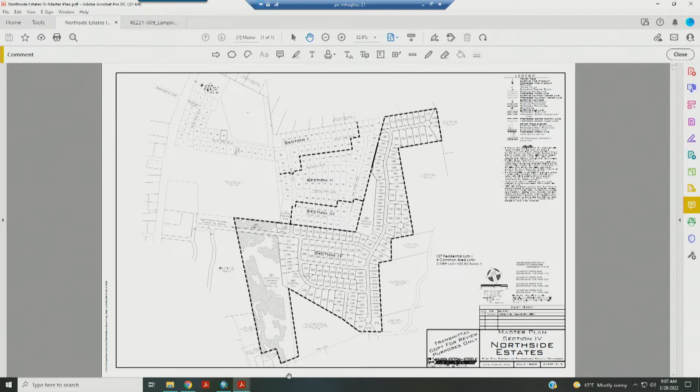There is Pitts Lane down here, and we're still looking at that. If any of y'all know Pitts Lane, it's no more than a nice wide driveway, so there might need to be some work done on it. But as far as drainage, going back to that, we're feeling pretty good about what they're proposing.

They've got a huge volume stormwater management area here that will hold back. We've asked them to evaluate pre and post volumes, so they're not sending more volume of water. They're holding back the increased volume on their side and not sending any more volume of water to the adjacent development. So we're feeling pretty good about that.

The only other thing that we need to work on, just a little fine tuning, is the kiosk. When it comes in with a preliminary, it's essentially a completed site plan. I'll try to zoom down to it. So there's a little fine tuning. We'll need some more spot shots, some grades, the handicap ramps. They've added truncated domes, but they actually need to have handicap ramps on either side of the driveway of this. So just some minor fine tuning, nothing we don't think is an issue.

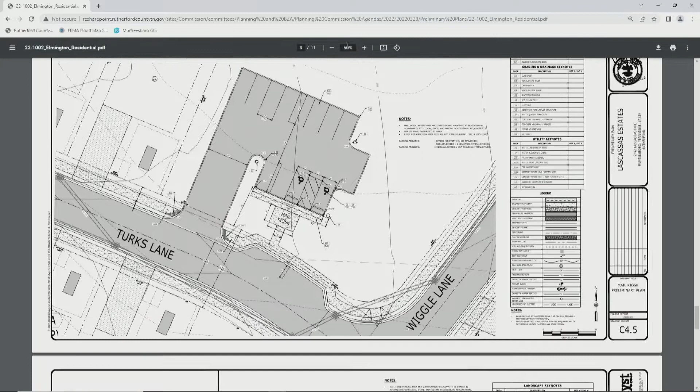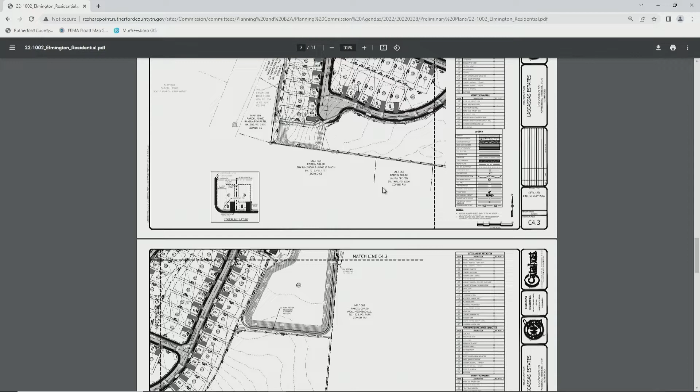Like I said, the real evaluation will come with the construction plans. So it hasn't been submitted yet, but we'll keep a close eye on the drainage, traffic, and everything else. This development will be adding turn lanes on Lascassas Pike, right turn decels and left turn, if you're coming south, you can turn left into the development. So there's a lot of work that's going to be done on Lascassas Pike, and since that's a state road, all that is coordinated with TDOT, and you can see all the turn lanes that they'll be adding with this development.

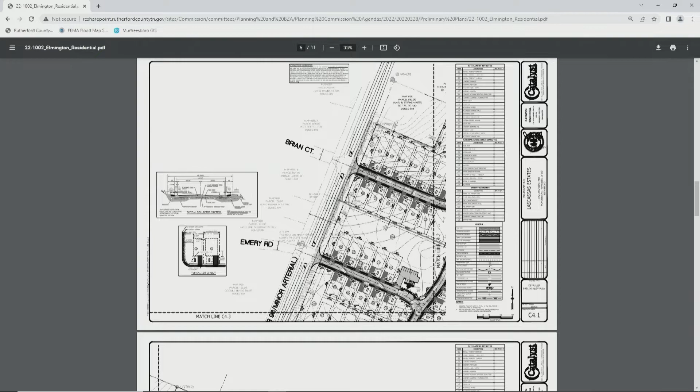So we believe they've addressed all of their comments except for a few minor ones, and what we said, working out with CUD with the landscaping, make sure they're not planting trees on top of the existing 20-inch water line. But other than that, we're in pretty decent shape. Thank you, Mike. Questions?

Mr. Chairman, I have a question. Mike, I know there's turn lanes going in there, but was there any additional right-of-way dedication needed in case of future widening to 5-lane? I was trying to think of what the overall plan may be down the road. Let's see, they have this. I know by the time they build it, it is in the long-range plan to be a 5-lane. Okay. I thought they had adequate right-of-way, if I can remember.

Well, when I was counting lanes up, by the time you had the right turn, the left turn, and the through lanes, you basically have the 5-lane template. Right. But I just didn't know if there was any additional needed there or not. I don't believe so. It's showing 120 foot of right-of-way. Okay. So we thought they had enough. Sounds like it.

Yeah, and then this, you can kind of see the water line. That little box keeps popping up. But the water line is right here. I don't think that's field located because it's too uniform right in the middle of that 30-foot easement. So that's something we'll need to coordinate with CUD. Okay, thank you.

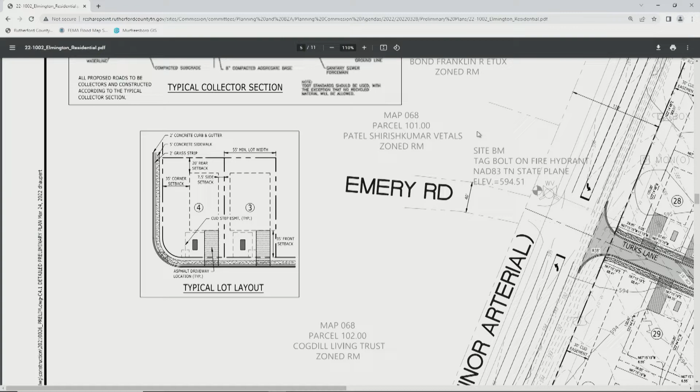Mr. Chairman, Mike? Yes, sir. I asked this question back when we approved it last fall. If you go back to the overall plan that shows the whole thing, the water that falls at Lascassas Pike is going to drain back to the retention pond. Yes, sir. How is it going to get there? I don't see anything that's going to get it there other than through somebody's yard, unless it goes underground. It will be underground. Yes, sir.

So there's an existing 30-inch concrete pipe across Lascassas Pike. They'll have to pick that up and carry it all the way to the east to the stormwater management area. So that's one of the tricky things, because it's so far away and it's so deep. It's going to be a challenge for them. But they are accounting for what's falling on the west side of Lascassas Pike and flowing through there.

But up in the corner up there, is all the water that falls on this plot going to drain to that 30-inch line, or is it going to be expected to go through my yard if I buy in the middle there? Are you talking about this area where that ponding was originally? Well, no, actually back further than that, where there's a whole set of houses going to be put. Up there to the master plan. Right there. Come on down a little more, Mike. To the left of that is Lascassas Pike.

Yes, sir. And you've got two rows of houses that come through there, so the 30-inch pipe you're talking about is going to go under those houses, through those yards. Of course, the other side of that is nothing that falls on that property is going to soak in where it falls, because it's all going to be rooftop and concrete. So you're going to have to take care of a lot of water.

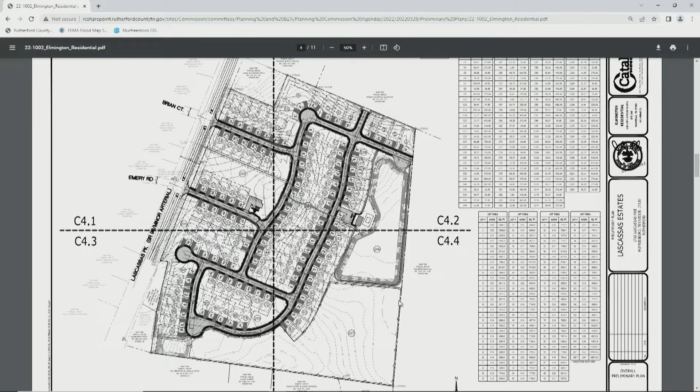Sir, and that was my issue on the front end with the rezoning package. Because this is such a volume-sensitive area, you're transitioning from a farm with good soil to a highly impervious area with a lot of rooftops, a lot of driveways, a lot of roads. But they've done a lot of work on the front end. If you zoom in and look at the preliminaries, they do show their proposed stormwater network in a lot of places. So they put a lot of effort and thought into this, but this will not move forward until we are satisfied with their construction plans, to make sure that this will not impact the future residents, but also the existing residents around this place.

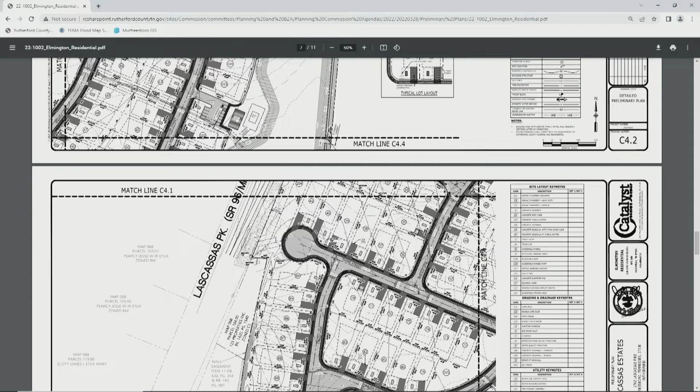One of my concerns is that 5 years from now, I don't want to come back in here and have some resident complaining because water's going across their yard. Yes, sir. Right. Because it needs to be taken care of before the foundation's ever put. And that's something we look at on the construction plans, but all through the construction process and then the as-built as well. Once this is all constructed, they have to come back with as-built plans, record drawings of what's in the ground, and it needs to match the design plans. So we've looked at it on the front end, on the back end, and all through the construction process.

So yes, we don't like ditches in the backyards, especially these small lots, because if you build a house, it's going to take up most of the building envelope. I think the minimum lot size is only 6,600 square feet. That's not a big yard at all. So if you put a house, the driveway, the patio, sidewalks and everything, you don't have much room for a backyard. So that's what we're trying to push the development community to: larger lots, larger backyards. And in some places, we're asking them, don't run ditches through the backyards because of the issues that we have.

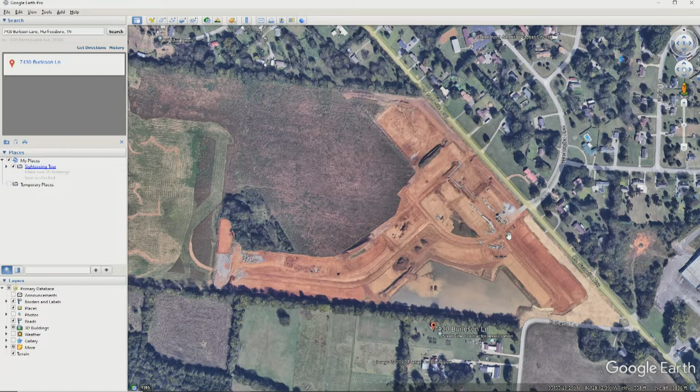So that's probably more than you wanted to know, but just to let you know, we're watching everything on the front end, during construction and afterwards as well. So, but Danielle is correct. We are feeling good about it. I'm sorry, I'm not trying to make this meeting any longer than it is, but there is...

We'll need some coordination with a drainage easement, just a small detail. There's a large ditch that runs in here. We need to make sure that this open space is okay. And there's something else we'll need to coordinate with CUD. Along the front, there's an open space. It is a planned unit, public utility and drainage easement, but it's also a CUD easement.

So we've got to make sure that CUD is okay with what's going on in this easement, because a lot of times they don't like drainage in their easements. So we've got to make sure that that's okay. And I think we're okay with it on the construction plan side, but that's just a minor detail we'll have to work out with them. Apologize. But other than that, the plat is in good order.

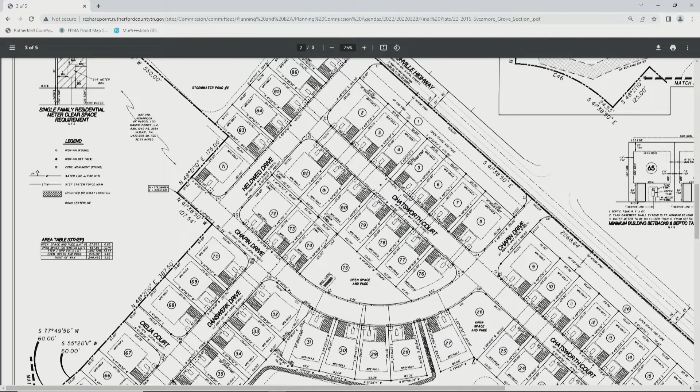Mr. Chair, I'll make a motion to approve, subject to staff comments. I'll second. We have a motion and a second to approve item 22-2015, Sycamore Grove, Section 1. Any other questions or comments? All those in favor of that motion to approve, please say aye. Aye. Any opposition? Motion to approve carries.

Thank you. One question for you, Mike. You got enough staff? We only had 2 here, and we talked about fine-tuning. Yes, sir. I wish I had 8 engineers instead of 3, but yes, we're doing the best we can. Y'all have heard me complain about FEMA buyouts on these older subdivisions. I don't like FEMA buyouts, and I can't stress that enough. So we're being careful on the front end to make sure that these houses are protected from flooding issues, but also making sure that the neighbors around them aren't impacted by these new developments. So, to answer your question, I wish I had 8 engineers instead of 3.

Thank you. Item 6B2, final plat. Item 22-2016, Clear Creek, Section 3, Phase 2, 25 lots on 19-plus acres on PUD located along Springwater Street. Clear Creek is the applicant. Danielle. Thank you. Clear Creek's preliminary plan was approved in March of 2016, and we found that the plat was, for the most part, consistent with the approved preliminary plan. But there's been an issue that we've been experiencing

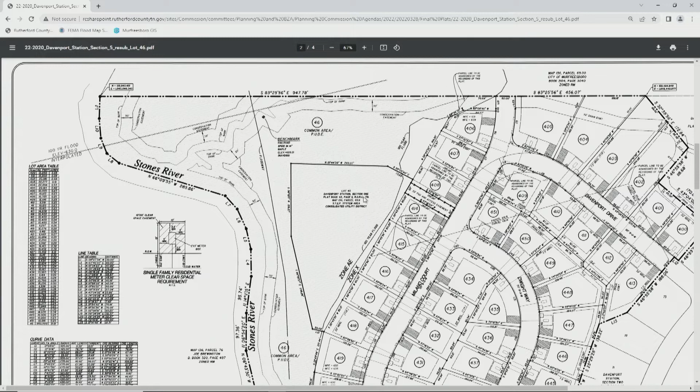So what we've kind of worked out is that this lot needs this part to be connected to Lot 46, or 45, sorry. And it shows a fence line type, and I'm not sure what the deal is. They've got this as a 30-foot PUD and access easement. We just would rather, instead of having a landlocked parcel on an easement and a separate parcel, go ahead and combine it with Lot 45, just to kind of clarify things. Other than that, I believe that was it.

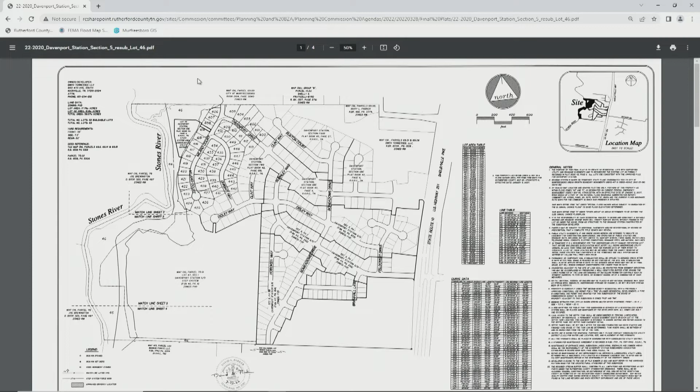I'll go back to the master plan and give you a preview. This is Shelbyville Pike, the new traffic signal is right here, and this is Burnley Way. And a little bit farther to the north, the city of Murfreesboro purchased the land right here north of this development at the end of Hemlock Drive. I will go over to that.

So this is where Section 5 will be, if you can see my cursor. The city, in the green right here, is already Barfield Park. Well, the city went in and bought this parcel, and I think maybe these two as well. So this is going to be part of the park expansion. And we left a stub street for access to that part of the park.

And from their Greenway master plan, I believe they're going to extend the Greenway down the river, but we need that coordinated with the city, just to preview what's coming. But there's a big park to the north. We'll have access to it, and eventually Greenways will come this way down the river. But the plat's in good order. I'm sorry, I get off on a tangent.

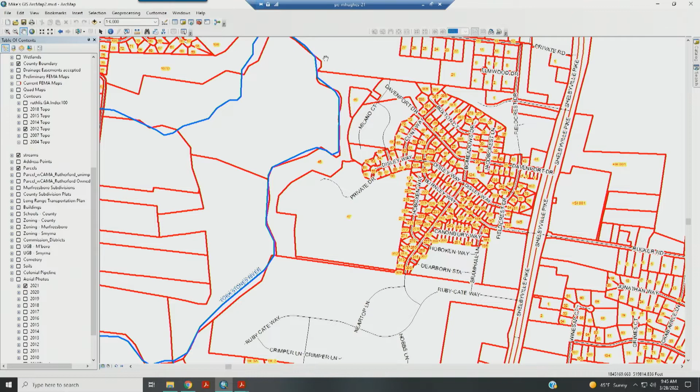Will the Greenway come across Woodruff Cove also? Yes, sir. It will. Right. Commissioner Lynch is saying this is Woodruff Cove as well. See, this is the Stones River that comes down here. They have a lot of common area back here as well. But we've asked the development teams on both developments, Davenport Station and also Woodruff Cove, to save room for a greenway expansion back through there. I don't know if y'all have been on the city's greenways, but I think it's money well spent to keep those routes open.

Make a motion to approve, subject to staff comments. Motion and a second to approve the final plat for 22-2020 Davenport Station, Section 5, and re-subdivision of Lot 46, Section 1. Other questions or comments? All those in favor of the motion to approve, please say aye. Is there any opposition? Motion to approve carries.

Thank you. Item 6B6, item 22-2021, final plat for Rucker Landing, Section 4, Phase 2, 8 lots on 1.91 acres, zoned PUD, located along Jackie Retreat Drive. MH Way is the applicant. Danielle. Thank you. The preliminary plan for this section was approved September 28, 2020. We found that the plat is consistent with the preliminary plan. The applicant addressed all the comments during first review. However, Mike, you had a comment regarding the lots requiring 2 feet.

Yes. So my favorite term of the day, fine-tuning. They have a note down here that says lots with 2 or more feet of fill will require a compaction letter. So I just want to clarify, so when a builder goes to the Building Codes Department, they automatically know that this lot should have a compaction letter. So I just need that added to the plat, which lots needed the 2 feet of fill. 2 or more feet, I should say.

Well, that's one of the items that we had talked about with the applicant. What happened was the installation of the septic tanks did not match the actual easement shown on the plat. So you'll see these 2 items on 222 and 223. Those are the septic tanks. That's how the applicant responded to that. Now, they may want to show an easement around that. You're right. CUD will want an easement around that, so that'll have to be worked out with CUD.

What's your recommendation, staff? We recommend approval, subject to staff comments and fine tuning. Sorry. I have one question, Chairman. Mike. Mike, looking at this document, the surveyor that's done this is not signed or stamped, and I notice in the top left, you have a lot of blank signatures from 2022. Is that a big deal?

No, sir. A lot of times when stuff is resubmitted to us, it does not have all the signatures. Doug is the last one to sign a final plat, or Danielle. So if these signatures are not in place, everybody else hadn't signed, they won't sign. Okay, thank you. And if the surveyor's stamp's not on it? Right, they won't sign it either. Other questions?

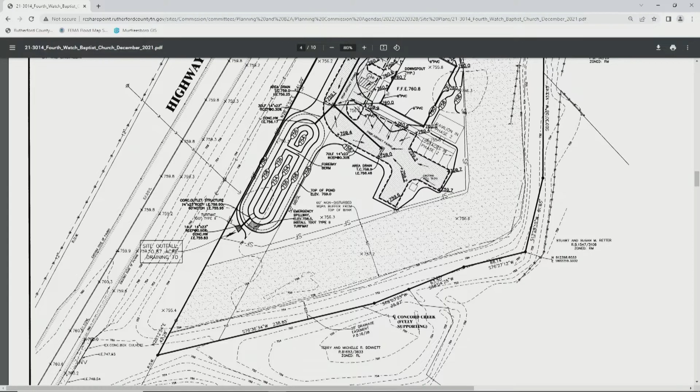Mike, my question is, you fill that, you build that, and you're going to put in paved parking, right? Where's that water go? Well, they do have a stormwater management area over here. It's always a challenge with conventional septic system lots. You can't do anything to the septic system soil area, which is on the north side of the lot, but they are doing their stormwater management down here in this area. So,

like I said, it's a fine balancing act. You have to fill the lot to protect the structures, but you can't fill over the soils area. So a lot of the lot will be left the same, just for the parking area. The church area will be elevated, and we're offsetting that with our stormwater management area. So it's a balancing act.

Yes, sir. Well, the reason I question that is behind that are other houses. The water does come out of that Concord Creek and comes to those backyards. Yes, sir, and like I said, we do everything we can to protect the houses around there.

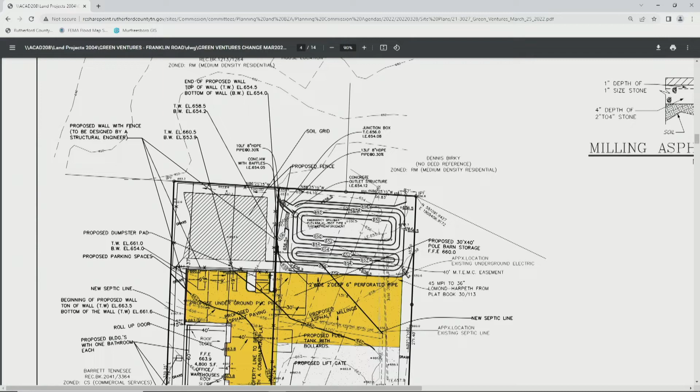But stormwater, I think they've made a lot of progress. They've made some changes. We still show a junction box that doesn't need to be there. I think it can be removed and just do a head wall here. So I think they've addressed all of our comments, just need to take that out and maybe put some energy dissipation in there, and I think they'll be in good shape. But it's in good order.

It is a TDOT road, so we'll have to get a TDOT permit to widen the driveway out here. That's the only other thing that we'll need. Staff's recommendation: approval subject to fine-tuning conditions.

Chairman, make a motion to approve with staff comments. Thank you, David. I have a motion and a second to approve site plan for 21-3027 Green Ventures. Any other questions or comments? All those in favor of the motion to approve, please say aye. Is there any opposition? Motion to approve carries. Thank you.

Item 6C3, 22-3004, Bluegate RV and Boat, construction of 136,781 square feet of automotive parking space, boat and RV storage, on 7.65 acres, zoned EAC, located along Miller Road. Bluegate Christiana is the owner.

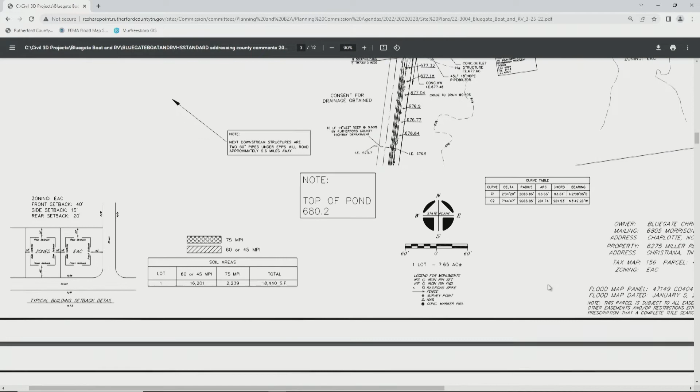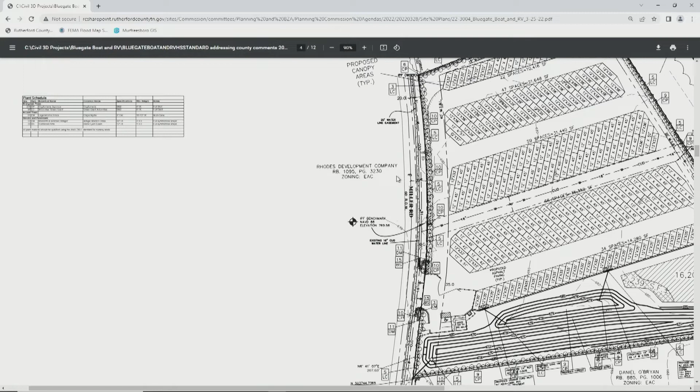Stormwater treatment units are designed to help sediment and clean the water before it gets into the pond. But they're calling these inlets these aqua swirl units. And from past design life, they are typically set not in the inlet boxes themselves, they're set downstream of those. To make a long story short, these double inlets won't be the units themselves, you'll have a unit past it right there. So that'll take some coordinating and fine-tuning. They have added a big forebay for us, and we're appreciative of that.

We've asked them to add a shoulder along Miller Road and do some ditch improvements. They've shown some spot shots, but not the grades. And there's an existing CUD water line, I think a 16-inch water line that runs along here, that we've got to make sure when you're making these ditch improvements, you're not uncovering the water line or reducing the cover over the top of it. So we'll need to see a little more detail of what's going to be on here.

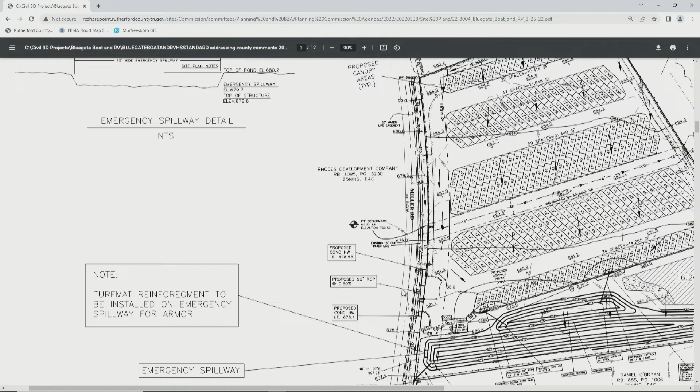Just a typo, they call out a 90-inch diameter pipe, and those RVs will have a hard time getting up and over that, so I think it's just a typo. That was supposed to be humor, but anyway, they will need to correct that. And so this is one we think we might need to see a little more cooking and work done on. They've made a lot of progress.

Another thing is the entrance gate. My assistant county engineer, Sheila Huffmeyer, is an avid RVer, and they go all the time. And we were talking about the gate setup here. She said typically there's an island in the middle. You drive up, you punch in your pad, and one of the gates opens. This one, they're showing a swinging gate that's 35 feet wide. We think it'll be a sliding gate, maybe one or two sliding gates.

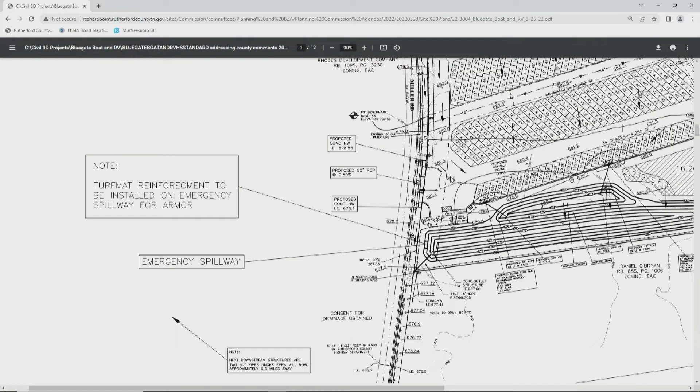So we'll need to see how the owner wants this to function, and is there an island in between. So that's something else that we need clarification on, and then of course the other things that Danielle's talked about, but it has made significant strides, but we still think that we need some more detail on what work needs to be done on the site.

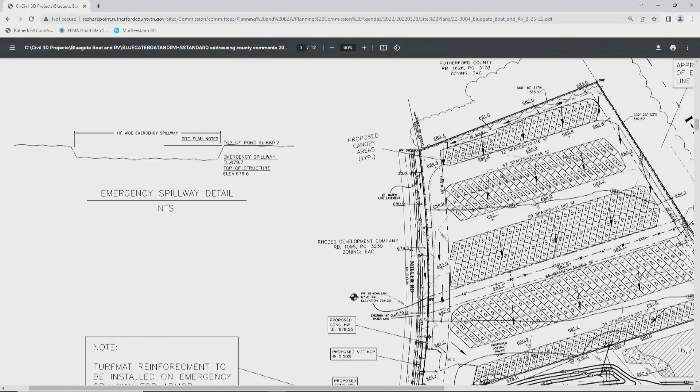Mr. Chair, it seems like there are an awful lot of issues to be worked out on this site plan. I know we've had this conversation before, that we like to see things pretty much the way that they are going to be when we approve something, and not bog staff down with doing design work and that sort of thing. So unless someone has arguments to the contrary, I'm going to make a motion to deny this plan.

Mayor, defer. We could probably defer it for 2 weeks and bring it back to the night meeting if you want to, or the next month, or day meeting for a month later. Mr. Chair, I'd like to revise my motion then to defer this for 4 weeks to our next plans review meeting. We have a motion and a second to defer item 22-3004 for Bluegate RV and Boat Storage.

Mr. Chairman, I have a question, if I may. Mike, on the stormwater runoff, I counted nearly 200 spaces on this property. Do those AquaSwirls treat fluid runoff, antifreeze, oils, something like that? I'd like to see that addressed. Well, it's a hydrocarbon sensitive area, yes, so we will probably need, no, the AquaSwirls do not. That's a good point. We will need something like we've seen at these gas stations that will treat these hydrocarbons. I'd like to see that addressed in this next plan as well. Thank you.

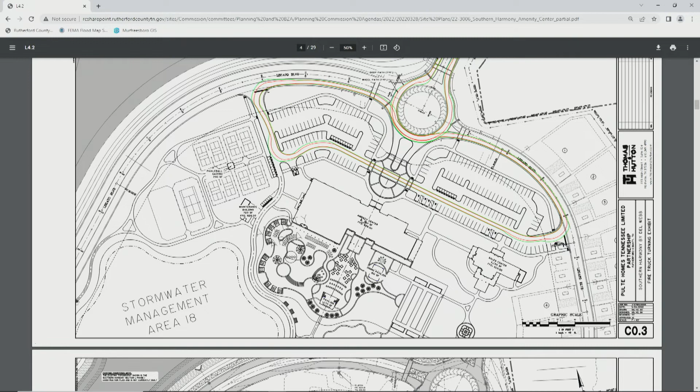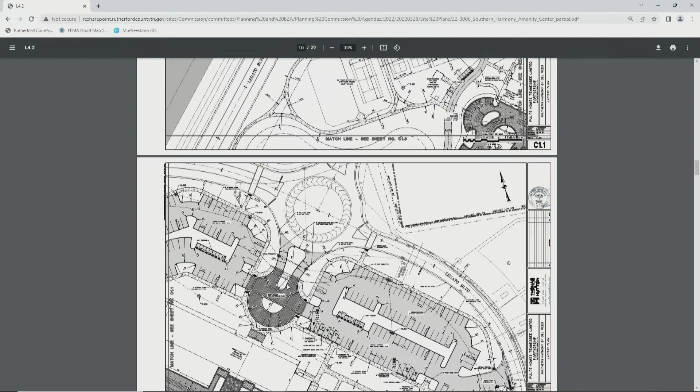So some of the things that we need some more, and again, fine-tuning, clarification is the ADA routes into the buildings, and I'll try to get to one of those. Like I said, it's a massive set of plans. I believe it's like 40 pages of plans. So there's a lot of work that went into this, and they're, like I said, a good looking set of plans.

One of the things that we always look for is the ADA, Americans with Disabilities Act, accessible routes into any facility. Now, they do meet the ADA requirements for parking spaces, and one of our comments was you've got a 6-inch curb along this circular front door of this amenity center. So if you're dropping off grandma or your wife or whatever and she's mobility impaired, she can't go this way if she's in a wheelchair.

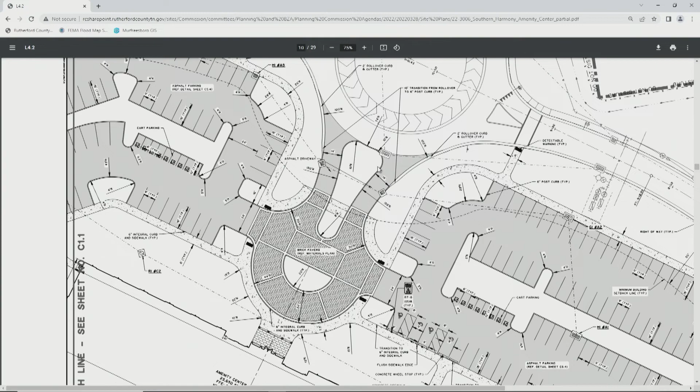So a lot of times we've asked that they make these drop-off routes ADA accessible. And so if you're driving up, you're going to stop your car, allow someone to get out, that it's an accessible route. The route that they're showing is good and meets our requirements, but I think it's coming in this way. So we just want, and this is a retirement community, so we need this to be accessible for everybody that's using this facility.

A lot of the work that's being done in Phase 1, they've got a great sidewalk set up. They've got handicap ramps in the roads. So if somebody's walking or is mobility impaired, they've got to be able to get across the street and all the way to the development or the amenity center or wherever they're going. So we've asked that they make sure that all these are ADA accessible, and they've agreed to do that. Like I said, it's 40 some odd pages, a massive set of plans. So there's a lot of work that goes along with that.

So, let's see. So going back and forth, and they have reached out to us. We have been able to talk to them about everything. So we'll ask them to change something. They'll do it, and then it might bring up another comment. So it's a lot of back and forth with this development. They are adding a huge stormwater management area that is interconnected to another huge stormwater management area on the other side of one of the roads in here.